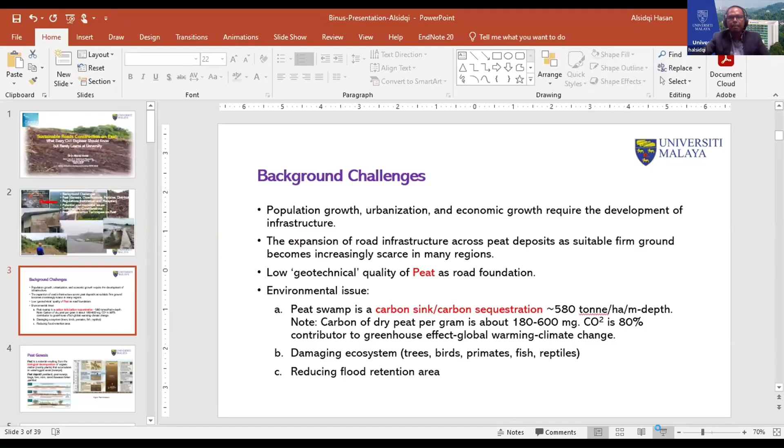Okay, let me share with you the slides. Give me a moment. Okay, are my slides clear? Yes, it is clear. But some of the audience said that your voice is a bit small, a bit low. Okay. All right. What about now? Yeah, I think it's okay now. Somebody says it's still low. Let me pause my video. Perhaps it helps a little bit. Okay. All right. So I'll just start.

My presentation today is talking about sustainable road construction on peat. This is something that we should know as civil engineers, but unfortunately, it is rarely learned at university. We might be introduced to peat, but perhaps in detail we never had that in class, right? So I'd like to share with you the things that I learned during my research and my activities as a lecturer. Same as you, perhaps we never learned these things at undergraduate or postgraduate level.

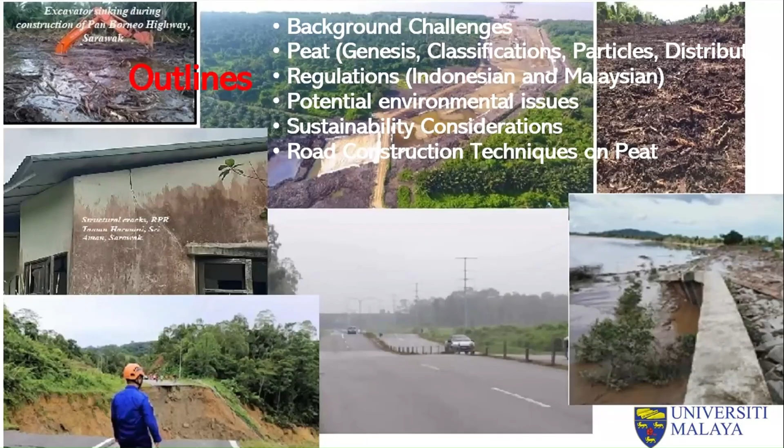So let's begin with the challenges. What motivates us, what necessitates us to delve into peat nowadays? Before, people might just see peat as something to avoid. When we see peat, let's just avoid it and take another route or alignment, you just avoid peat 100%.

But nowadays, population is growing. 10 years before, our population was perhaps 80% of our population today, right? We increased by as much as 50 million and 100 million in Indonesia, Malaysia and Southeast Asia. Therefore, we need places, roads, infrastructure. With the expansion of road infrastructure, we cannot just avoid peat anymore. So we should anticipate building infrastructure or roads across peat nowadays. That's a must.

Otherwise, we no longer have an adequate place for our road to be constructed. Okay, therefore, there's no more choice. We don't have any more options. We just have to deal with it.

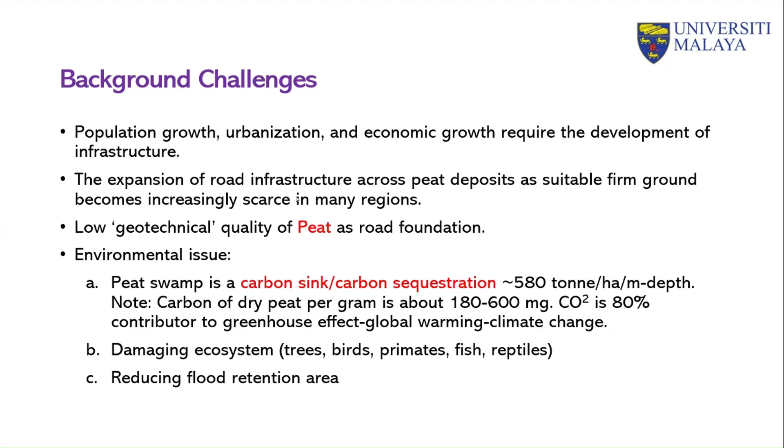All right, so let's start with peat genesis, the origin of peat. Most of us know how it originates, but probably most of us don't know the mechanism. It actually comes from plants, and after that it decomposes biologically, eaten by bacteria and fungi, and as a result of that decomposition process, the bacteria and fungi release carbon dioxide as their secretion. Their metabolism produces gas, like a secretion from them.

They eat plants because plants have sugar in them. Of course, it's not the sugar we usually eat, but for them it still contains some sugar to get energy. Once they decompose it, it releases carbon. It converts the solids from the plant into carbon dioxide, gas released into the air. That's what we call biological decomposition. It involves breakdown of the dead plant by bacteria from bigger to smaller particles, then released as gas.

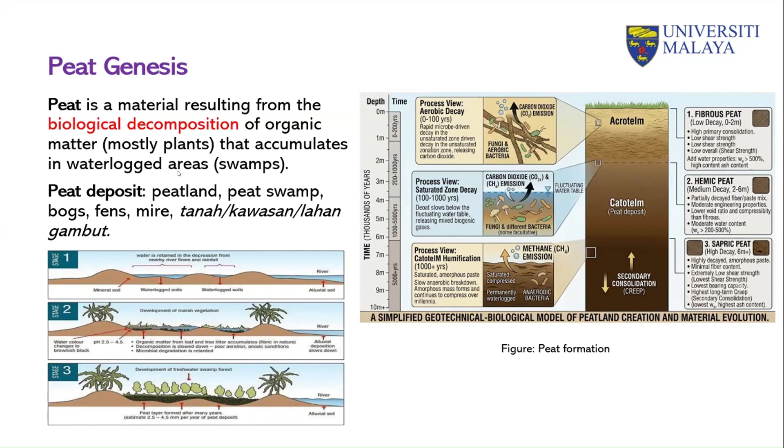Okay. All right. So let's take a look at what material we are dealing with. Since it is placed on ground, and we know that ground also has some other type of material, which is the soil that we know, made of minerals, like sand, gravel, clay, silts. Of course, there is no such thing as 100% organic matter contained in peat. So the peat itself contains less than 100% for sure, but it's not uncommon.

You can find peat which is 99% also, but it cannot be 100% because it must contain a little bit of non-organic matter, non-plant, coming from the minerals, like silica or other types of minerals. Therefore we need to define somehow what we call peat, because the percentage of organic matter, the plant that is decomposed, is less than 100%. But unfortunately, so far we don't have a consensus. We don't have a fixed terminology for what sort of organic matter should be contained in peat.

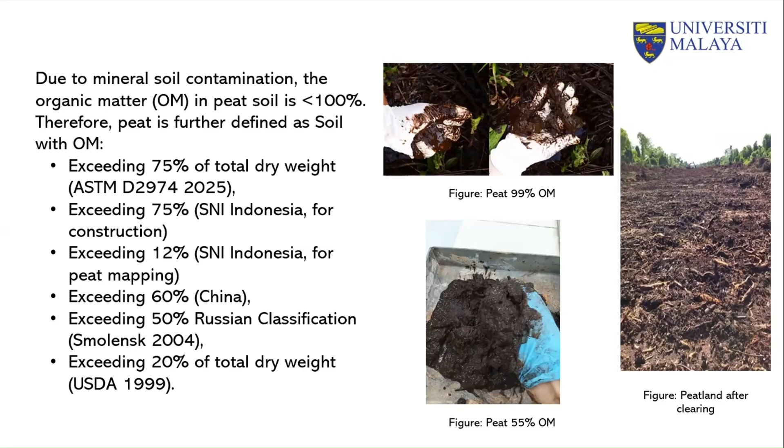And then, peat is not part of soil. Some people distinguish peat from mineral soils. Peat is another material that has its own classification. So let's take a look at what sort of classification we should know in order to distinguish peats, because they are not the same. When we refer to ASTM, there are three classifications: fibric, hemic, and sapric. These are classifications based on the fiber content.

When plant decomposes, eaten by the bacteria, it starts from fiber. You see a lot of fiber in the dead plant itself. So it starts with fibric, and then moves to hemic. When decomposed over a longer time, it becomes smaller and smaller, darker and darker, so it becomes hemic. The fiber content becomes less. And then with further decomposition, it becomes sapric. Sapric is towards the end of the decomposition cycle, so the end product of the decomposition, we classify as sapric.

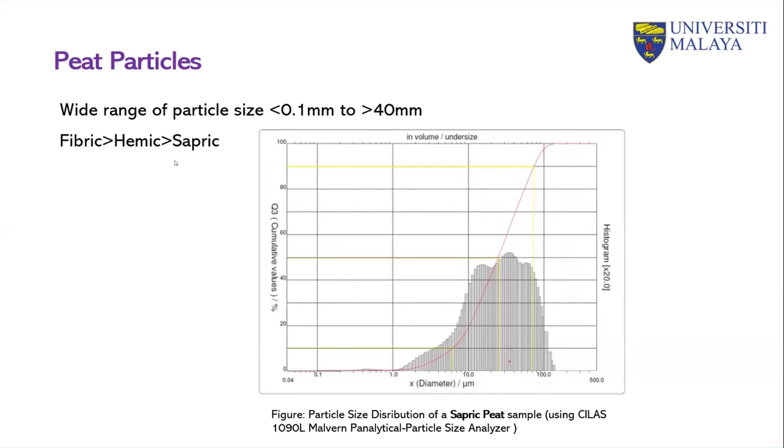And if you want to see the particle itself, you have to use a scanning electron microscope, where you can see the details of how the particles look. It's totally different. It's not like the mineral soil that we know: sand, silt, clay. When you look at sand, you see rounded materials. Silt is pretty much rounded as well. Clay is plate-like, flaky, sometimes hollow tubular shapes. But peat is different.

Peat is what we call amorphous. There is no shape. Amorphous means no shape. We cannot even tell what kind of shape it is. But we can explain what sort of things are in there. For example, we have honeycomb matrices, like the bees' honeycomb. It's like cells. Of course, they come from plants, so you can see the remains of the cells. That's what we call honeycomb matrices.

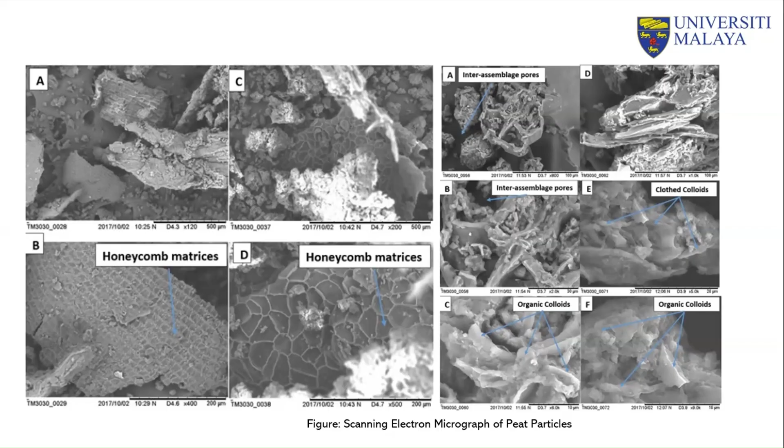It's like cloth, very flaky materials in the peat. So that's how we can explain and describe what kind of particles we have. So it's not like mineral soil, right? Okay, so that finishes the peat morphology.

Now let's talk about peat distribution, so we face the reality of what we have in our country and also in our region. I'll give you some statistics. The world has 4.3 million square kilometers of peat, about 3% of world land. World land, not world ocean, is comprised of peat. By continent, America has the highest amount of peat.

You may look at Canada, North America. Canada is the topmost country that has peat. And when you look at South America, Brazil also has a huge amount of peatland. Then come Asia, Europe, Africa, and Australia is the last. If you go to Australia, you see pretty much a desert, but it still has a little bit of peat in Queensland, and in North Australia you'll probably see a little bit of peat.

What about Southeast Asia, the region where we live? It's about 25 million hectares or 250,000 square kilometers. Indonesia has most of it, almost 90%. The statistics give a wide range of numbers, maybe because a lot of institutions or agencies do the mapping. So we have 124,000 to 240,000 square kilometers, approximately 13 to 24 million hectares of peatland in Indonesia. It occupies 7 to 12% of Indonesian land.

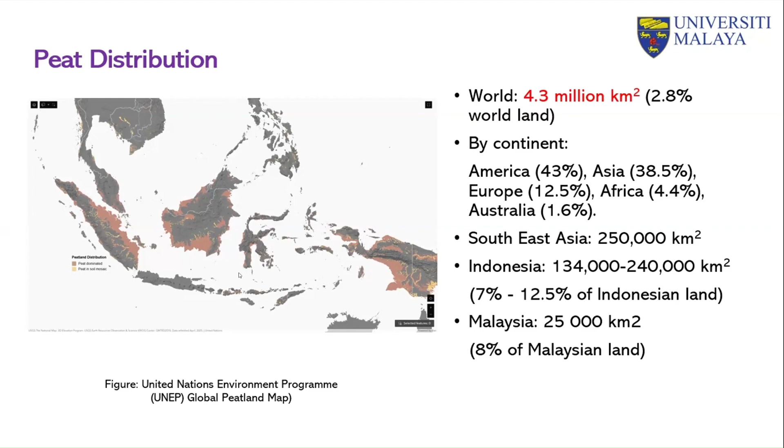Now, as an engineer, as I said, we need to look at the regulations that regulate the use of peatland, because we are dealing with road construction and infrastructure, and we're going to make use of that land. In Indonesia, we have government regulation PP, Peraturan Pemerintah, number 71 of 2014. If you remember, that was the time when a huge amount of smoke came out from Indonesia, and our neighbors complained about the smoke from peat fires.

In 2014, during the Susilo government, this government regulation was made, and then amended by Joko Widodo in 2016, also when the smoke and peat fires happened. So this government regulation follows the problems: when a problem comes, then the government regulation comes. So that's what we have in Indonesia.

But nevertheless, thanks to that government regulation, we can make our peat safer. We also have the INPRES, the instruction of the president regarding licenses. When you build a plantation, a sawit plantation, and there is a moratorium on new licenses, they have to look into the details of your project before the license is granted. And we have a decree of the Minister of Environment and Forestry regarding the peatland itself. So these are the regulations that Indonesia has.

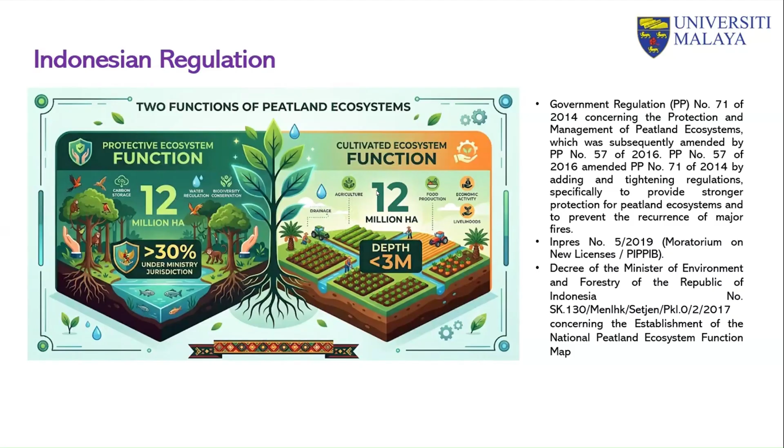According to the regulation, peatland is classified into two: protective and cultivated. The protective one is very protected. We will see whether we can do road construction in there or not. But cultivated, of course, we can make it productive land. We can grow plantation, vegetation, whatever. We can make it part of our daily activity in that particular area. All right, what about in Malaysia?

Instead of two, Malaysia has three classifications: rank 1, rank 2, and rank 3. Rank 1 is similar to the protected one, very protected. The government almost doesn't allow anything to be done in this particular area. Rank 2 is maybe in between the protected and cultivated regions in Indonesia. Cultivation is allowed, but a certain control is made. You need to follow certain regulations.

Rank 3 is pretty much allowable, even when you do construction in there, without limitation. But of course, there's still an environmental impact assessment that you need to have in that particular area. So instead of two, in Malaysia we have three ranks, three classifications. These are the rules Malaysia has, more or less similar rules that they need to follow.

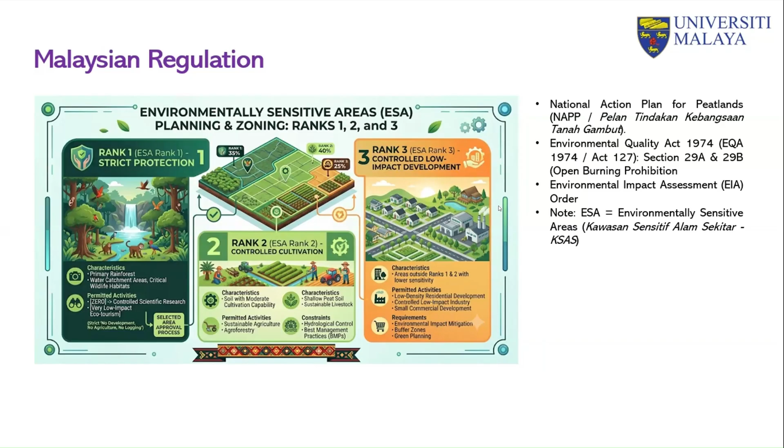So how do those rules relate to us as civil engineers? We want to know whether we can build a road in that area or not. That's what we need to know. In Indonesia, in the protective ecosystem, the protected area, we can only build a road if it is national strategic infrastructure, proyek strategis nasional. And if it is an emergency route, like tsunami evacuation, we can build a road in that protected area.

Upgrading existing roads: if we already have an existing road in that area, we can upgrade it. No need to demolish the road. These projects need approval from the Ministry of Forestry, and we cannot drain the water. So when you build a road, you need techniques where you don't drain the water, for example pile-supported or elevated, building bridges instead of conventional roads. So the cost will be much higher when we build roads in this protected area.

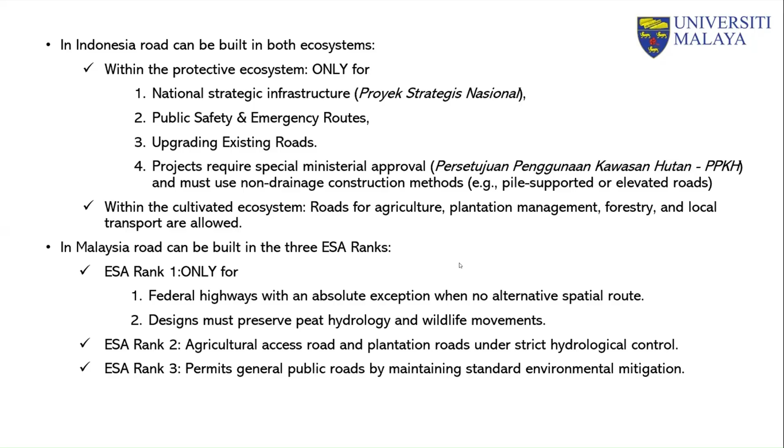So done with the regulation, and then what we need to consider in terms of environmental. Okay. So let's go back to the carbon problems that we have. So when we release the peat into the air, when the peat is no longer underwater, what's going to happen? The carbon will be released to the air. All right. That's the thing that we need to consider.

Do not release the carbon. Try to minimize releasing carbon to the air because we want to make our world safe from carbon, from the greenhouse effects. Okay. So what happens when we expose it to air? The bacteria release the carbon to the air straight away, directly release it to the air, instead of preserving it in water.

So remember this type of bacteria, the majority of the bacteria is aerobic. They need oxygen. So when we store the peat under the water, that bacteria cannot live. Only a very, very small percentage is anaerobic, that doesn't need oxygen. 99% of them need oxygen in order to eat the peat and also release the CO2. So when we put it under the water, that decomposition or that carbon release becomes very minimal. That's why we should not expose it to air.

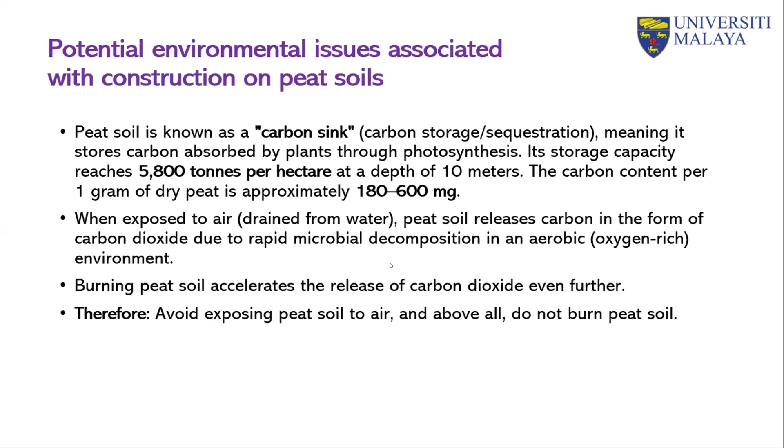So do not excavate the peat. When we do construction, try to minimize excavation. We'll see how we do construction on peat later on. And above all, of course, you cannot burn it. It just becomes CO2 straight away. Everything becomes CO2. Okay, so that's the thing that we need to consider. Not much. We don't need to dig into what kind of gas, we just need to avoid exposing it to air. All right. So what will it affect?

So when the carbon is released to the air in large quantity, more than the threshold, more than the limit that the air can sustain, then it will affect us, our livelihood, and also the ecosystem, the animals. For example, the shellfish, they cannot grow their shell. Remember the shellfish like shrimps, their shell becomes soft because of that carbon in the air, and then that carbon precipitates.

If the carbon in the air accumulates and then rain precipitates it to the water, the water becomes acidic. That acid makes the shell of the shellfish or the shrimp, for example, become soft, right? The crab has a shell, the shell becomes soft. And then our reservoirs, we have no more retention ponds to prevent flood. So there are so many things that can happen as a consequence of the carbon in the air.

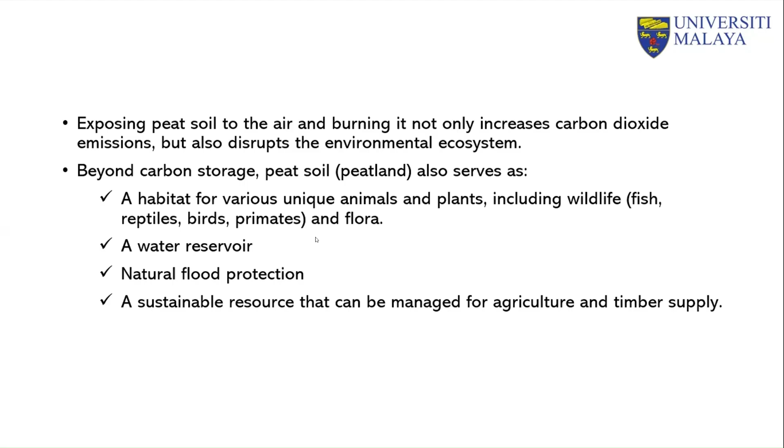Okay, so let's take a look at the peat. The peats in Indonesia, what kind of peat do we have? Is it different from those in the northern areas, the temperate regions? Let's have a look. Indonesia's peatland area is the largest tropical peat. Now, there is another classification, but this classification is not technical. We call it tropical peat because we are living in the tropical area. But there is a little difference. I'll show you later on what's the difference.

And also we have the oldest peat on Earth. Recently, a researcher found out that, to what we know so far, this is the oldest peat on Earth. Where is it? In this area that I circle here. Anybody know where this is? It is in Kalimantan, yes. It is in West Kalimantan, but a particular town. Anybody know? This is Putussibau. Those who come from West Kalimantan, I think you know this area. Putussibau is quite far from Pontianak.

I've been several times in West Kalimantan, but I've never been in Putussibau, unfortunately. I want to go there sometime, especially now that our oldest peat on Earth is there. So those who like to do some research, go there. We have the oldest peat on Earth in Putussibau.

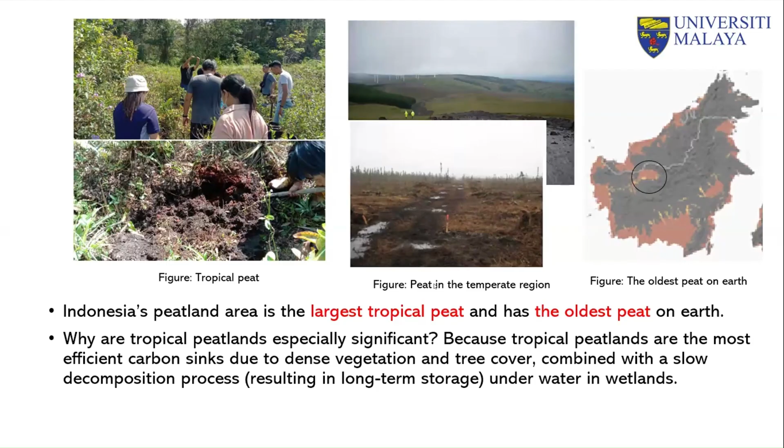So the chemical compositions are a bit different. But we don't really need to go that far, we just want to see what's the difference. Of course, there is some implication later on when it comes to characteristics of the peat itself. All right. So this is the type of plantation in temperate region. Most of the peat is derived from this plant. It's called sphagnum.

So Dr. Hassan, sorry to interrupt, but you have around 2 to 3 minutes left. Okay, okay. All right, thank you. If that's the case, I'll wrap up.

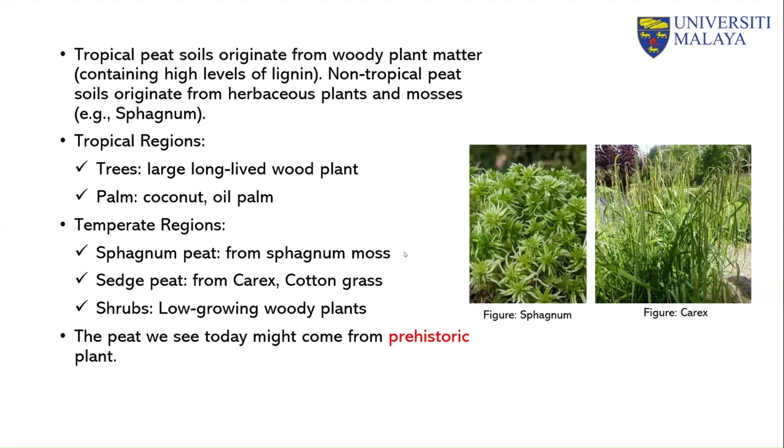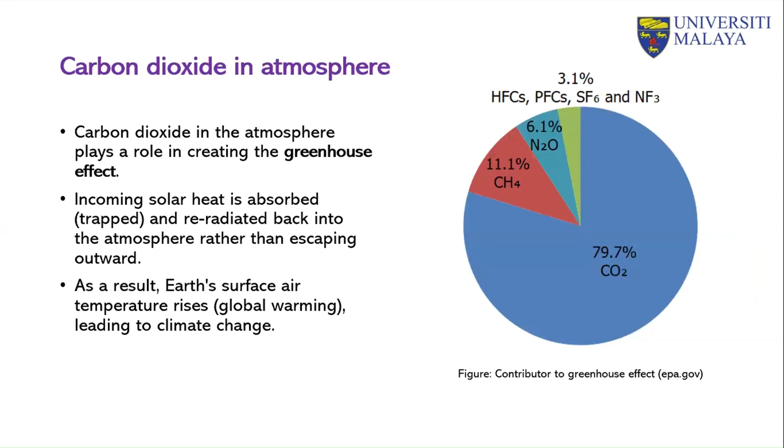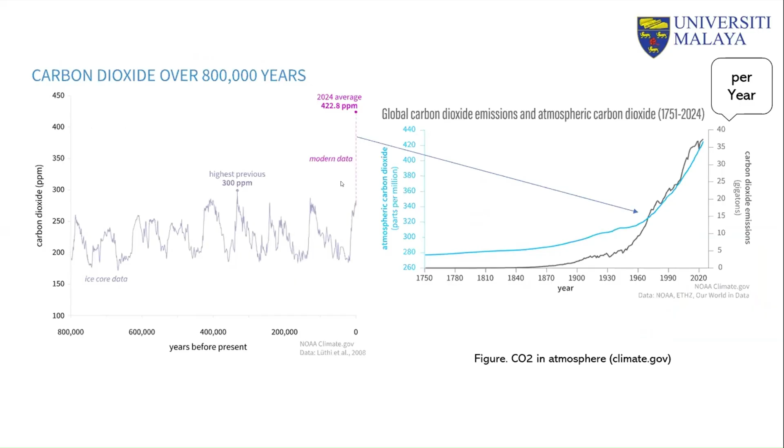This is the most important probably for all of us as engineers, because the things that I'm going to explain after this are just technical. All right. Carbon dioxide, I think I explained already why it is important, and then how we reduce the carbon dioxide and what's happening in the world. Actually, I have the figure. Unfortunately, I cannot explain too much. What we have nowadays is just an exponential increase of carbon in the air. I'll give you the slides later on.

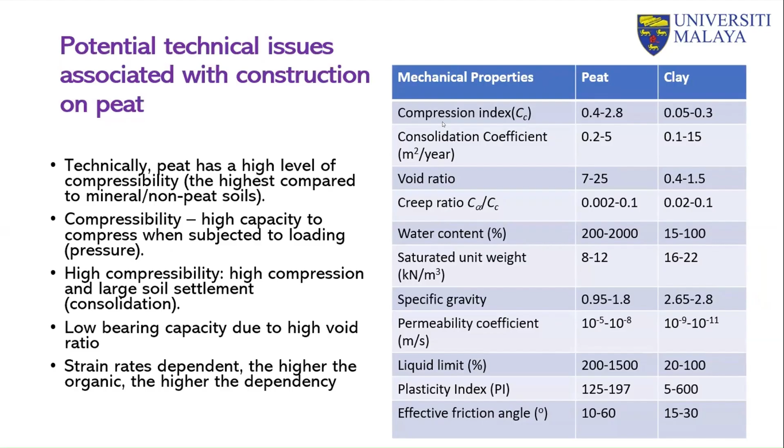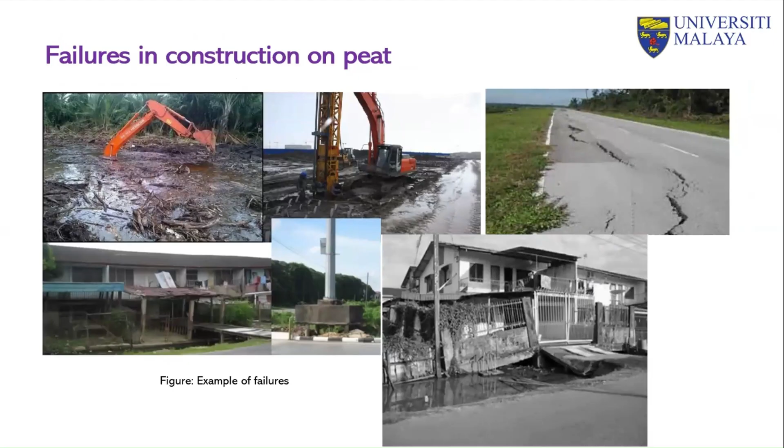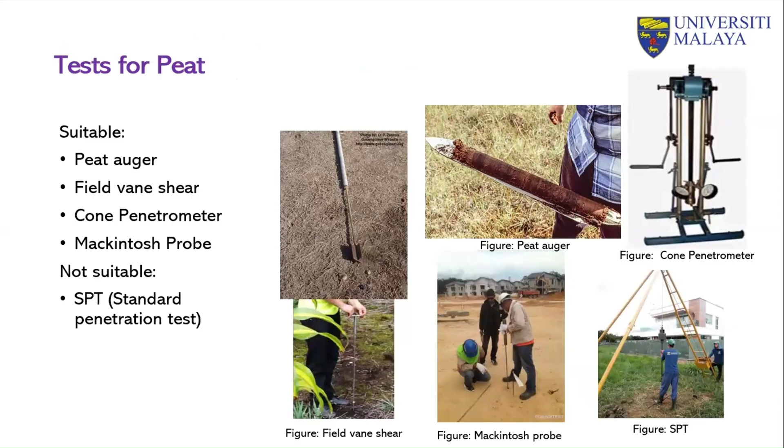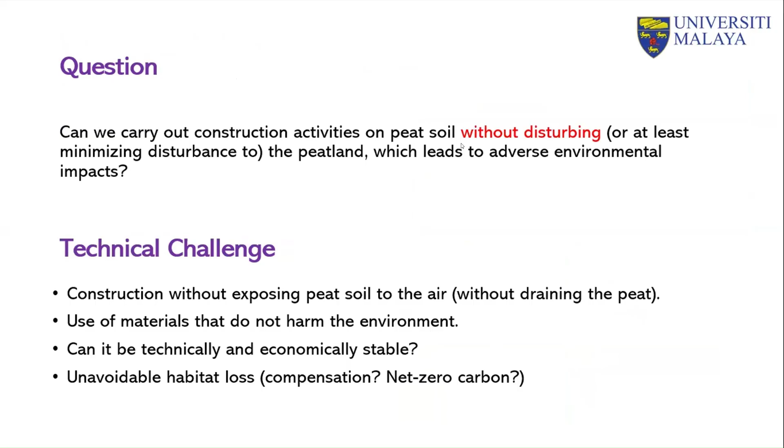You can have a look at the range of technical properties of peat, I informed here. And this is the kind of failure that we have in peat when you don't consider it in your design. What sort of tests do we have in order to investigate peat, for the technical properties? Now the problem is, can we construct on peat without disturbing the peatland? Of course we can, but we have to consider what we just discussed, that excavation thingy.

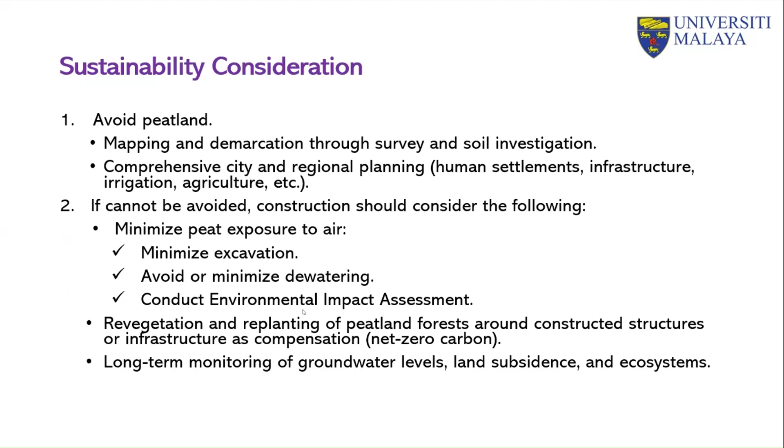So first, avoid peatland if possible. If it cannot be avoided, then we should do what we just discussed. Minimize excavation. Avoid and minimize dewatering, so don't reduce the water level, and conduct an environmental impact assessment. These are the three things that we need to do. All right. Road construction techniques. I think more or less we learn this in university, right?

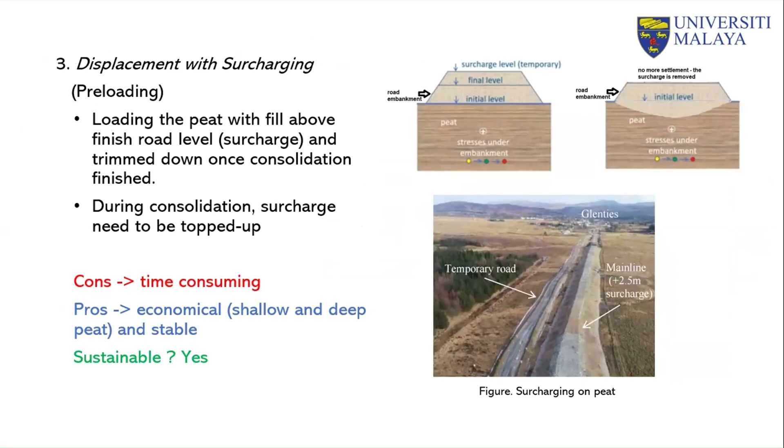Pile foundation. Remove and replace, but this is the thing that I want to focus on here. It is not sustainable. So do not remove the peat from its place. You can do other techniques, but don't do this. But in fact, still many consultants and contractors do this, which is not sustainable. Displacement and surcharging, I think most of us who learn geotechnical engineering, foundation engineering, know this. This is sustainable. Vertical drain, PVD, is sustainable.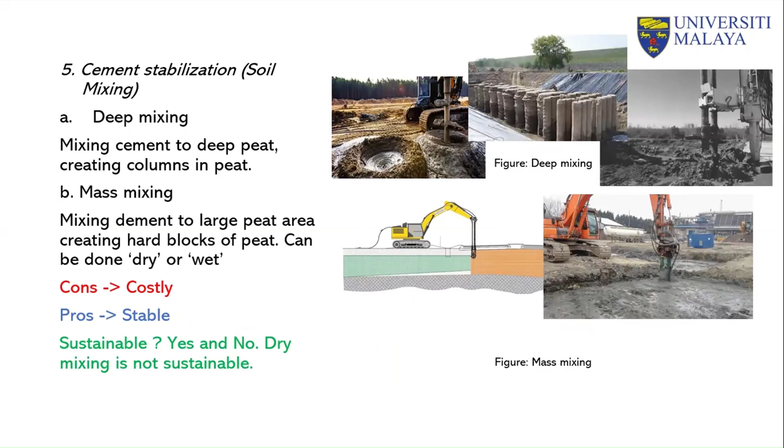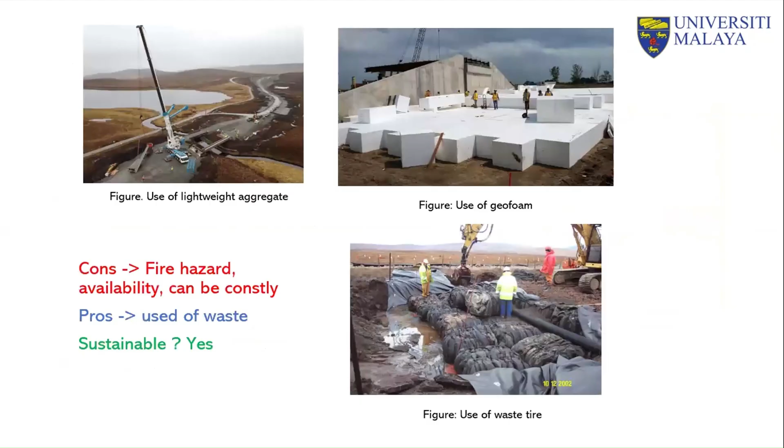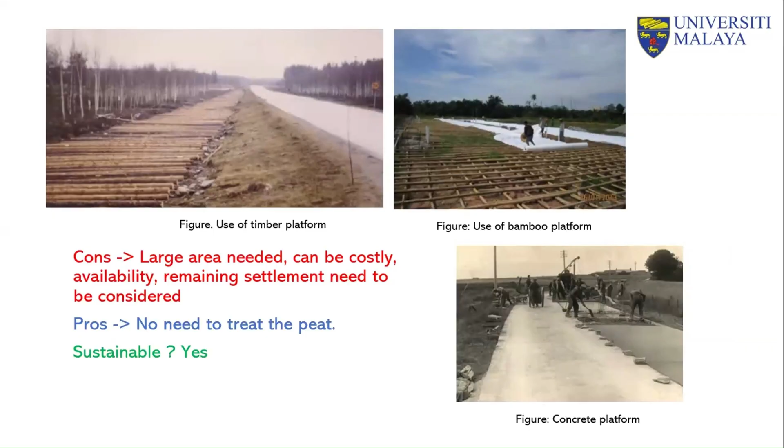Cement stabilization can be sustainable and sometimes it's not sustainable. When you mix it with cement in a dry mixing method, it's not sustainable. And then use lightweight materials like styrofoam or sawdust. It is sustainable. Rigid platform, concrete. Geogrid, geocell, there are so many products nowadays you can use. It is sustainable, you can use this for sustainable road construction. Okay, so that's pretty much it, because I have only 2 minutes left, reminded by the moderator.